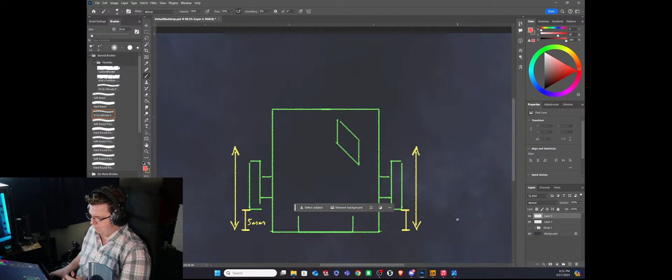Oops. Actually, I need that green back. Actually, okay, minor issue, but I did mess that up. It needs to be like this. It needs to be oriented vertically. So this is still connected to our vertically moving piece. Now let's grab another color to represent the cross piece. Actually, I should just keep this drawing open. E for erase.

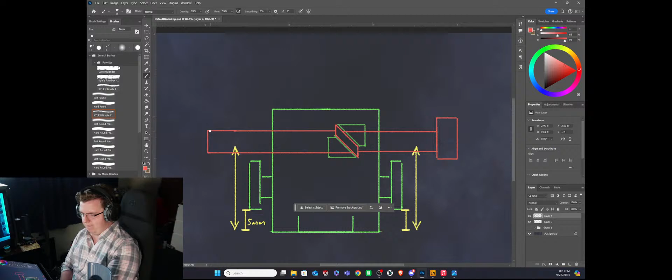And then this is a ground plane over here, so it is not allowed to move. Actually, I need to place that slightly differently. Place it about there. And this pin is allowed to move through it. And then we have a spring, and a cap to the spring, so basically something for it to push against. And it would be pretty helpful for this if this piece here were threaded. So we'll draw some threads like that.

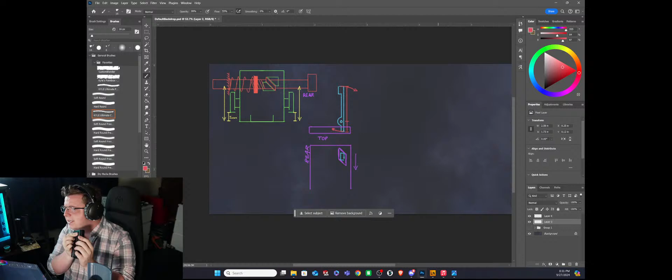With the AR style magazine, it has the rectangular window that you can just make out if I get the lighting right. Right there. So we're actually going to be putting them in backwards. And the reason why is when both of these are loaded backwards, it brings the feed ports for the magazines a lot closer to the same position. And so that's going to simplify the design process for me a lot.

So matching this up with our drawing, this is how you would be looking at that magazine. So feed port at the bottom, windows up here at the top. So we need to accomplish a similar mechanism for the SMG. Using that downward movement, we want to be able to release or grab onto the tooth sticking out the side here. And I've come up with a way to do that, that again should work.

So this is a side view now. This is our piece that moves vertically down, and all we have to do is connect it to the tooth over here with a pin located above it, and then that pin, I didn't line these up very well. That pin is rotated by, or the arm rotates about the pin based on the downward movement of our green piece here.

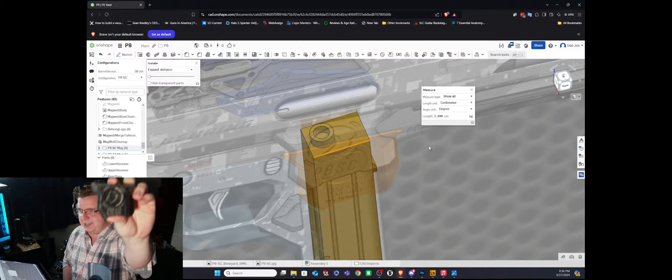And you're gonna have to pretend you didn't see this for a minute. You can see this one. Let me get that closer to you guys. So we've got the bearing logo. It says P8SC on it, 10 by 25 millimeters. And it's been done with my FDM printer with a 0.6 millimeter nozzle, so it's not very detailed, but you do get the idea. The issue that we run into is if we try to load the magazine into it, which is not suggestive at all. There. Like, it does work, but it's quite stiff. I don't want it to be quite that stiff.

Now, we are working on a P8 AR, so let's pull this guy out. And let's see. Goes in like so. This one is sliding very easily. In fact, too easily. So we can learn something from the fitment of these two, because one is too tight, the other is too loose.

So we have our P8SC as we said that this was 35.84. I'll just put my units here. So everything's in millimeters. We have 35.84 and then we idealize that to 36. That's too tight.

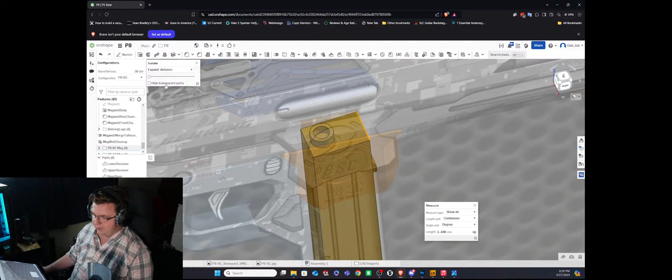And you are absolutely right, Wills. One of the great things about 3D printing is, in fact, that you can prototype and not be losing a ton of money every time.

Again, let's isolate our magazine. So we rounded up to 8 centimeters, which is 80 millimeters. And we made that 2.6 centimeters. No, wait, 26 millimeters. And in reality, it is 25.04. So let's just say 25.1. Actually, no. 0.04 would round down to 25.

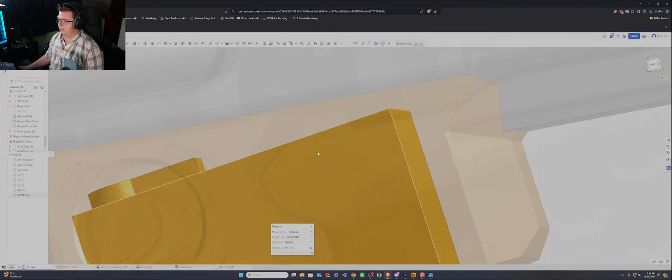So the closer these are together, the better that fit is going to be, but we don't want it to be so tight that it's uncomfortable to put the magazine into the gun. So let's adjust these now. And I think I was naughty and I did not define these as variables, so I should do that. Desmos on my other window so I can copy these down easy.

This needs to be length. No. Depth. This one needs to be... okay, so now we've got those defined. The other thing that I've gone ahead and done is I've gone through and renamed most of these features in the CAD so that they're a little easier to understand what they are.

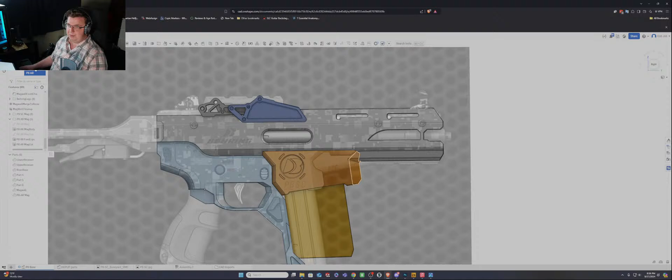So we've got the P8 AR fixed. Now we need to fix the P8 SC. So let's switch back to that configuration. And close that folder, open up the P8 SC mag. We don't want this to be 3.6, we want this to be P8 SC mag depth, which will increase it just a little bit. And then we don't want this to be 2.4 centimeters. We want it to be P8 SC mag width. Just gonna, again, increase it just a little bit. And that will update the Boolean so that now I can send these to the printer and test these fitments.

So let's do that. Actually, it doesn't matter what I name it here because I'm just going to rename it when I actually save it. Yes, replace. And then change the config. Export this one.

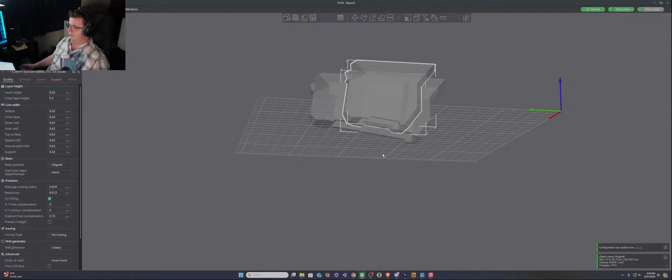It takes, so I'm not actually printing the magazines. I'm printing the mag wells. There we go. We set those on the bed. Let's make sure we've got these set up correctly. I also want this to be Arachne.

Ooh, I almost forgot something. For this magazine in particular, we need to accommodate the tooth on it. So we need to do a couple more things.

Big odd job. I'm going to take that as a compliment. I'm going to assume that you were noticing that I was getting those gains in the gym and not that I was gaining weight. Which, speaking of, how's that for a protein shake? It's mostly water, but does have 2 scoops, so it should be 70 grams.

Okay, so on the P8SC version, I've got this little channel that is supposed to accommodate the tooth. But it doesn't go high enough. And the problem with that is when we're inserting the magazine,

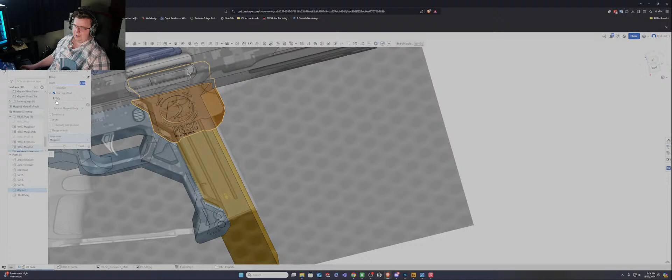So let's see. What I'm going to do is I'm actually going to have it start from this face, go the other way, and actually, you know what? For this part, I actually want it to go all the way through. So I'm just going to make that 5 so that we for sure clear everything. And then I'm going to create myself another variable.

And Onshape doesn't like you putting spaces in your variable names. So what I'm doing here is called camel case. Not to be confused with anything else, but it's basically where instead of doing a space, you do a capital letter every time you change words. So we'll just save that there, because we need to create the geometry that moves in order to reference that tooth. So I was getting a little ahead of myself.

Yes, I want to replace it. Now I can go back to Bambu. And now if I reload from disk, there, see? It updated right there. Like this with coding, you do this type of thing, yeah, yep. It's a really popular thing in coding. That's actually where I picked it up in my intro to coding for MATLAB class, and I use it all the time now.

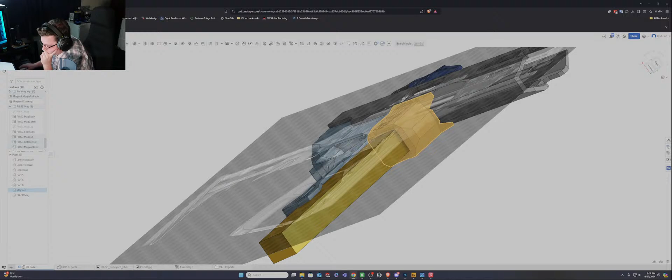And I should be able to share this on stream with you guys again. Let me try and figure out how I did that before. Okay, I think that I should be able to just turn on the printer. Oh, heck yeah, that's working. All right, cool. So we can have this kind of chilling in the bottom. Bring my face back.

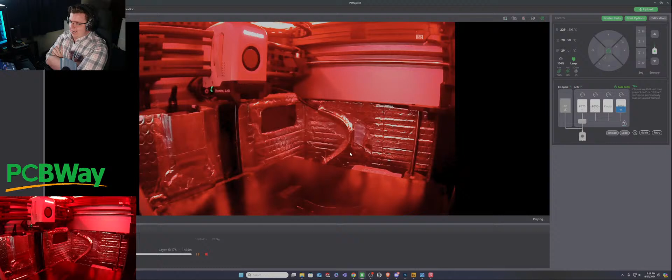BL LED is an ESP32 based light controller, and I'm using it to provide myself with status LEDs. So right now this red color indicates to me that it is in the nozzle cleaning stage of its print. And so the print head is going to move towards the back, and it's going to do a kind of a wipe mechanic. Once it's done cleaning the nozzle, then it'll cycle through some other colors as it progresses along its setup stage.

Let's see. "At my school before, I had a friend who just had a print that was the entire build plate. It was just a big cube. It was a day-long print for like a 6-inch cube." Totally know how you feel, Wills. My first printer was an Ender 5 Plus, and I hardly ever use it because it is so slow. Compared to what my Bambu can do, it's just not even worth the time to set it up.

Okay, so now that we fixed our tolerances, let's try and figure out some of the math that we need to be able to get these mechanisms to work. So switch back to screen 2, put you guys on the other screen so I can read what you're saying while I'm working. We're going to be doing a lot of trigonometry. So I hope you guys have your triangles ready.

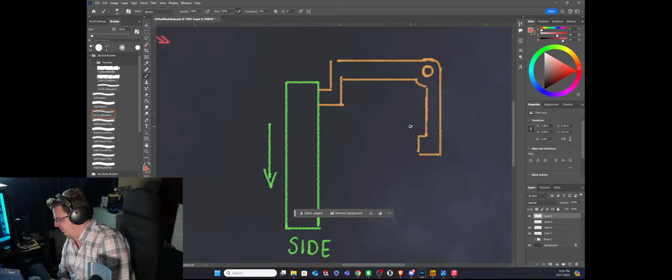So essentially what I'm saying is, let's see, I need to decrease the opacity on these guys. And what was layer 7 doing? I don't think it's doing anything actually. I think I just added that one.

So what we're trying to do is we want to get this piece here to move by 2.5 millimeters. Okay. And we have this distance that we've yet to determine. We'll call that Y. And we've got X. And we quickly see that we really need to know how much this distance truly is, that this piece is allowed to move vertically.

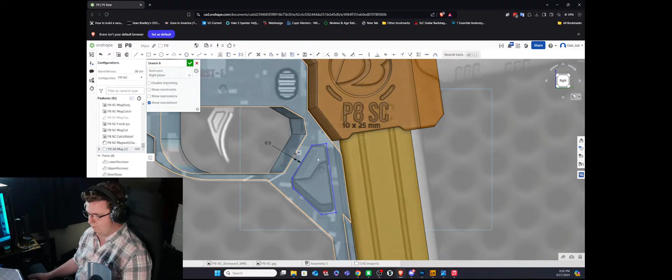Interesting. It looks like this is not a... It looks like this line is actually horizontal. So instead of making that perpendicular, I should probably just make that horizontal. That seems to match the shape better. Weird.

And this one seems to be vertical too. Okay, let me pull up another picture because I want to make sure I'm looking at that right. Yeah, it's definitely not perpendicular to the magazine slide. It doesn't look like it's totally horizontal either. I think I'm going to take some creative liberty here. Because it is such a small difference, I don't think anyone's going to notice. Except everybody now watching, I guess.

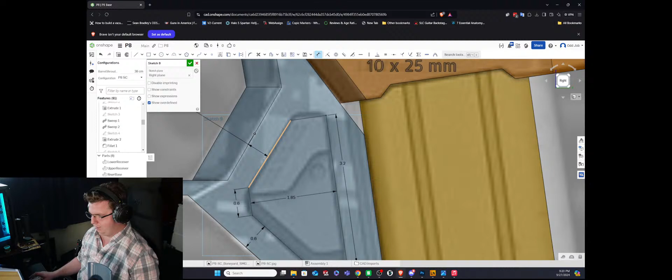And so for now, we can draw it as coming to a point because we can add a fillet to it later. I think what is going to be best is if I model the whole first and then do the moving part. Actually, you know what? Let's not do that. Let's make these two lines parallel. Okay, so now this is locked into place. We can extrude this as a removal.

Big screen back. There we go. So we're going to extrude this as a removal. I want to work on this side first. .35 looks about right. And it's really angry with me right now because the radius of this fillet is way too big. Let's try 0.2. Seems like it's happy with 0.2. And 0.2 does seem to match up pretty well with what is in the reference photo. So we'll make that permanent.

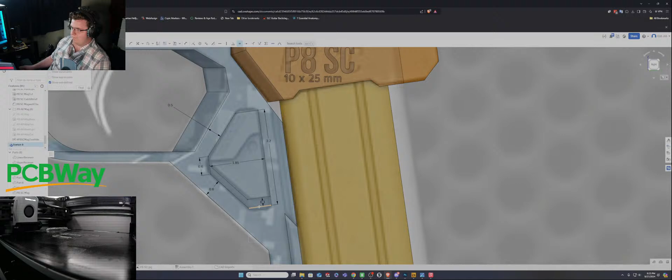I want to make that 0.3 so that I have just a little bit more leeway. So this should be allowed to move 0.3 millimeters up and down. We're going to make a new piece by extruding this. We'll set it to 0.5 so that it sticks out from the side just a little bit. Just a little bit for now. We'll make it a bit more tactile in the future. We do want it to be new.

And here's another cool trick. If we move this up above fillet 3, then we can then edit fillet 3 and include these guys. Like so. And then we need to also include extrude 13 in order to properly include fillet 3. So now we have part 10 over here, part 9 on the other side. And these are our sliding mechanisms. Oops. Okay.

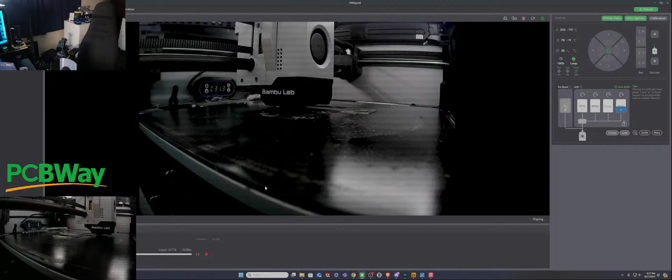Oh, yeah, the printer should still be doing its calibration. Let's see, it's saying first layer defects were detected by the micro LiDAR. I've noticed that it really struggles with the translucent filaments. So I'm gonna go check that real quick, just make sure it's not eating itself. I'll be right back. Alright, everything's happy again. It was fine. Like I said, it struggles with the translucent filaments.

Let's go to screen 2. Okay, so now, because of how we designed it, this distance is now known to be 0.3 millimeters. Okay. So now we need to get this swinging arm to fit inside this narrow section here, and it needs to have its movement contained within this thicker section here. So we don't have a lot of room to play with. I think we'll be okay, because I can make a rather tall part to get it to be rigid enough.

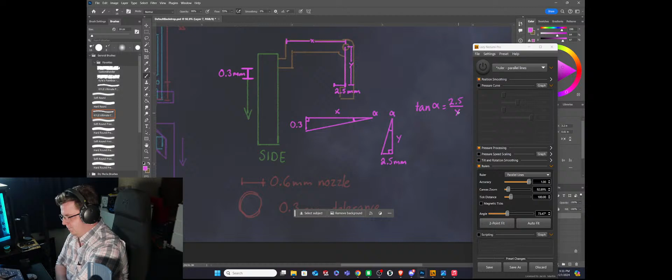So let's see, in this case, let's call this angle alpha. So alpha, we've got adjacent and opposite. So it's going to be tangent. Tangent of alpha equals 2.5 over y. Nope. Wrong. So y tangent of alpha equals 2.5.

We also have tangent of alpha equals, that can be 3. I need to keep my dimensions consistent. Equals 0.3 over x, opposite over adjacent. So x tangent of alpha equals 0.3.

And ultimately, we are solving for y, and we don't need x to be anything specifically, but we do want it to be at least the depth of our magazine. So we determined that to be 30... what do we call it? We said that that was 36.4 millimeters.

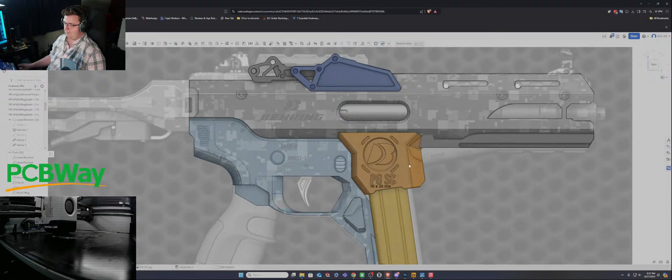So from the right side, or the right plane, we're going to draw some reference geometry. And for now, I want these two guys open. These are parallel to each other, or perpendicular. These guys are parallel, and these are actually incident. Make that transparent. Go back into this. Oh, I don't want that to be transparent actually.

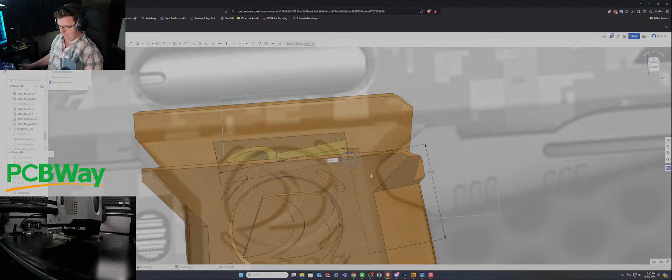I just thought of something. And I don't know if it affects anything. I don't think it actually does. So I'm going to keep it to myself.

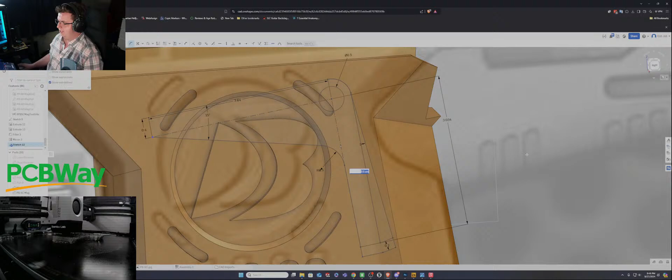And I want to add a radius to this guy because bigger curves are stronger. I don't know why this point still shows as undefined. We're going to remove some geometry from Magwell. We're going to extrude this symmetrically by mag width depth, or P8 SC mag width, plus 0.25 centimeters.

And I want it to be this face, this face. I want it to be all of those. And I wonder if I can get away with 0.5 centimeter. That would be pretty sick. Oh, looks like I can. Sweet. That doesn't create any aesthetic problems across the bottom. I want to increase this offset a little bit though.

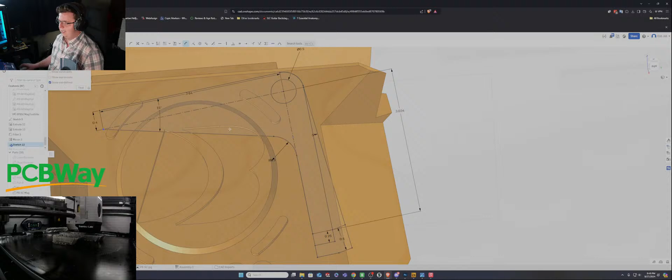And then we're going to create one more piece of geometry here. Make those guys parallel to each other. Set this equal to 0.25. Take a look at that on the inside. We want to include this shape as well. Ooh, I'm gonna need to carve out space here too. I'm gonna do that while I'm thinking about it.

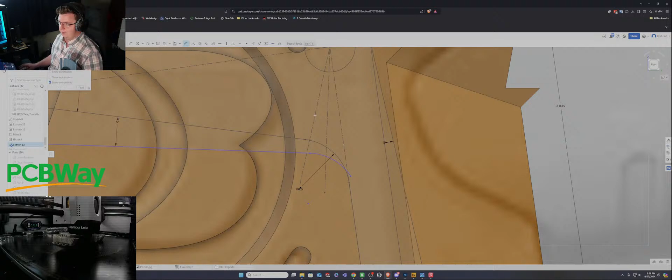Doesn't need to be horizontal. It needs to be what I tell it to be. To actually be the same. I do want these guys to have a relationship to each other. So what I can do is I can set these two lines equal to each other. And I can make the angle between them 5.

That does not need to be perpendicular to that. These two are incident. And there we go. That should work. Did that work? No. I don't think it did.

There we go. That's what I was missing. That should be a fairly accurate presentation of how it's moving. And that's going to totally wreak havoc on the extrude function we've got here. We just need to add additional faces to our selection. There we go.

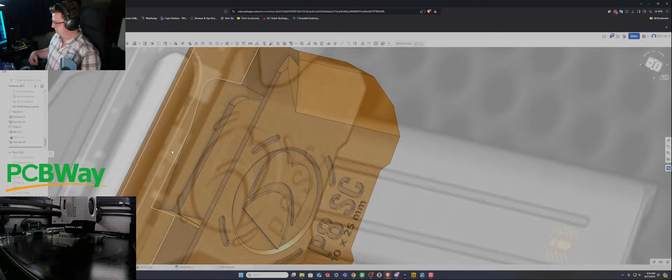Select sketch 12 again. We're going to do another extrude. This time we're only going to select this circle. And right now I just want it to be there. Actually, you know what? I need to make another circle here.

This circle. So this will be our pin that the mag release is allowed to ride on. And I don't think we need to do a whole lot to constrain it because it's going to be pretty deep inside the gun, so it's not like it's going to have an easy time falling out. Matching pin on the other side.

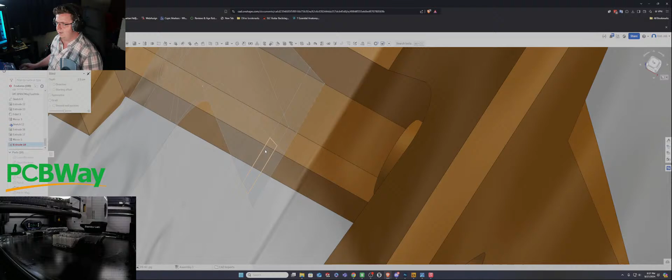And we want to do another extrude with this face. Yeah. So all of those faces. I want to create a new part. And our starting offset is going to be this entity, 0.25.

And then we're also going to want to mirror... Well, actually, no. I can do this a little more cleverly. If I extrude this face in the opposite way up to... Actually, I think I can do up to next. Add it to this guy. Okay, I do need to do up to face, and then I need to click that one. Include that in my selection as well.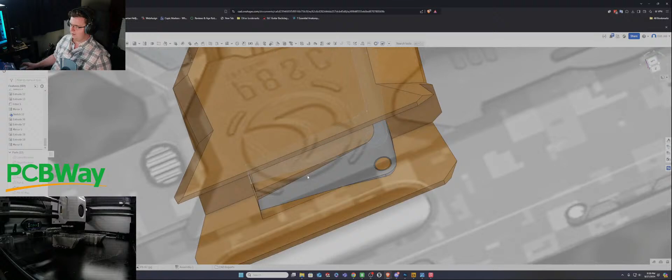And then I can mirror this. I don't want to reference a sketch. I want to reference my principal plane. Okay, that should be a working magazine release mechanism. So let's jump into our assembly here. Actually, let's go back. Let's name this. So this is part 11. Oh, but you guys should be the same part. So this is our magazine catch for the P8 SC.

Now we can jump into our assembly. Let's insert that. So this is the part we just designed, and what'll happen is when the magazine tooth slides up past this bar across the middle, it's going to push it forward, and then the spring tension from our principal spring in this whole assembly will push it into the catch position after it glides past. So this should actually work. The best laid plans always run into some issues though, so I am prepared for that.

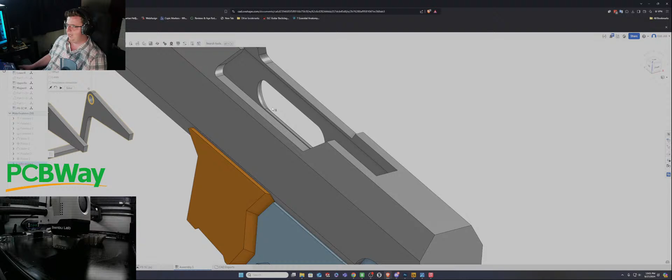Let's hide some of the airsoft parts I added in here. Let's mate this to... Let's see, so we'll add a revolute mate there. And we'll connect it that way. So we should have enough clearance that this is allowed to move. And it should be able to move 5 degrees, no more. And when it moves 5 degrees, it should just clear the tooth. So I think we are set on that part.

Okay, actually, I know what I should do. Let's isolate these parts. Then we'll make the magwell transparent so we can see a little bit better how it's moving. Where is it? Am I just blind? Alright, well, let's just look at it from here, I guess.

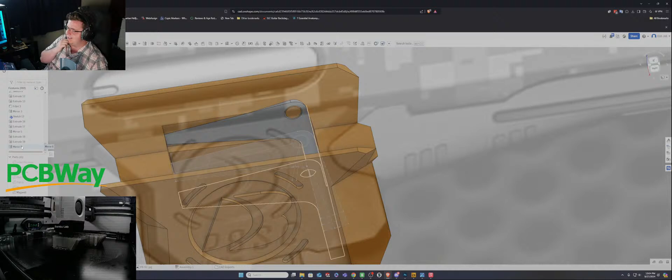Let's see, that fillet is actually defined by a sketch, so I need to change it there. So we make it tangent to these two sections. It should give us enough of a gap. Let's just make sure that we include it in the selection here. And if we go back to the assembly, we should see that that's cleaned up a little bit. Yeah, that looks good to me.

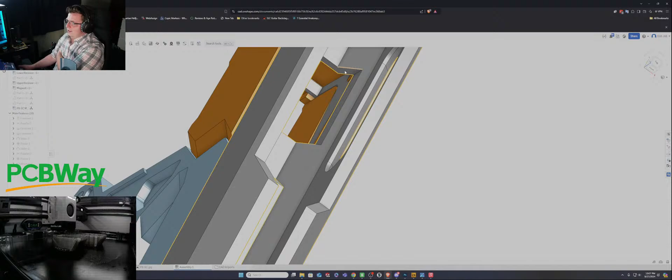One thing I do notice is it looks like the extrusion of the magazine through the upper receiver might need some work, because we've got a little bit of a lip here. That might not be an issue. No, it definitely is, huh? So let's adjust that then. That is this extrusion. Okay. Yeah, I need to not do that as symmetric because that's causing me issues. Actually, maybe it's fine.

Alright, well, let's just Boolean the magwell to the receiver. Subtract the magwell from our target. We want to keep the tools. Oh, no, okay. I think we're good then. Well, something clearly is colliding here.

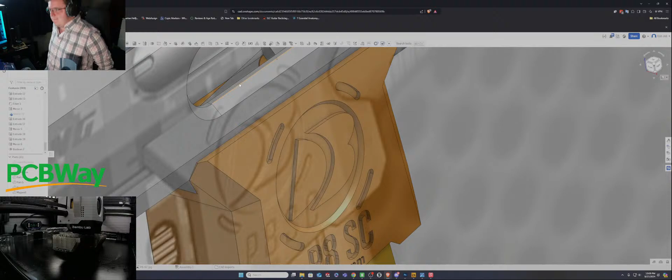How can I fix this without having to redo a bunch of work? Let me hide this so that we can see our geometry a little better. Here's what I'm looking at. The mechanism we just made to release the magazine, it's clearly intersecting here. I don't think it should, but clearly it is.

I think what I can do is I can extrude the top face of... Let's play around in the assembly, see if it's causing the issues I think it is. You can see it's clearly inside that other piece. Can't have that.

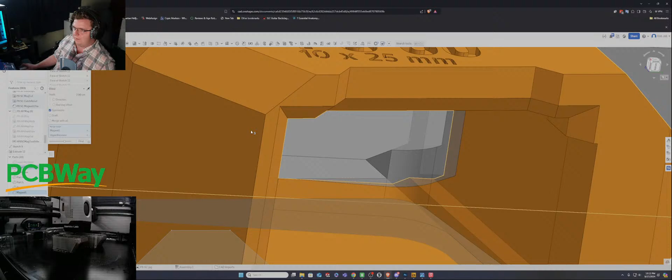Okay, I think what I can do is I can combine the extrude that we just did to create a pocket. Can merge this to upper receiver as well. Extrude up to the right face.

Starting offset set as... wait, cancel. Okay. I wanna do that differently. Oh, that's right. We set this as a... so I think as long as I include the upper receiver, I think I'm actually good. Yeah, it might rub a little bit, but I think we're set.

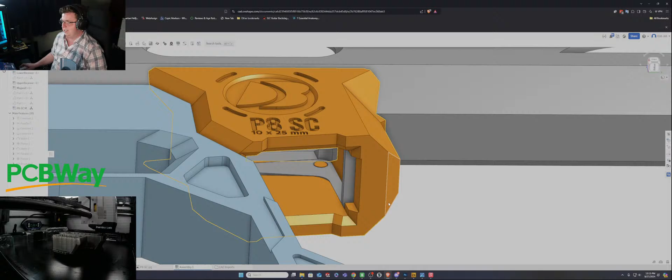Right now, we are working on getting the magazine catch working. So, to anyone that's new to the stream, we've got a tooth on the side of the magazine there that we need to catch. So this gray piece that we've just made will allow the tooth to slide past because it's got a slant on it. And then once it passes, it will move back into position under spring tension to keep the magazine locked into place. So it should be pretty secure.

Let's take a look how our X1C is doing. It's chugging right along. We should be able to test our improved tolerances in just a little bit. So now we need to tie all these parts together. And trying to think of the way I want to do this.

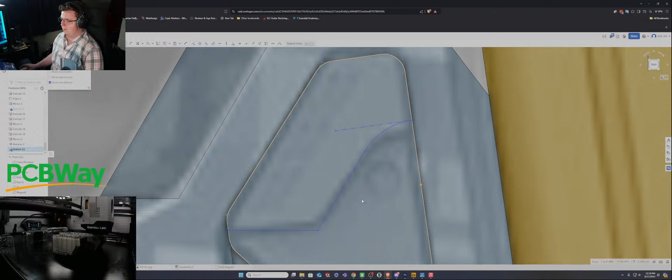It's some catchy beats, right? Thank you, oh, what's his name? Harris Heller from Senpai Gaming. Just add a mental laugh after that one beat drop, yeah.

Actually, don't want to dimension that. Instead, what I'll do is I'll pull that onto there, and then it doesn't matter what the dimension is. I'm gonna call this 3. Let's see. If I get a 3mm steel pin, which is probably going to be the best way to assemble that,

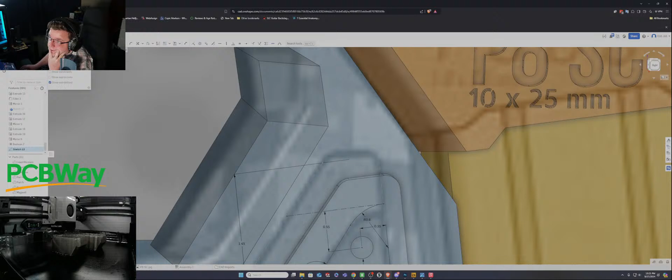Heck, sketch or convert. Why is that not doing what I think it's supposed to be doing? Oh, I was using the wrong one. There we go. Fighting me. Guess I can do it this way.

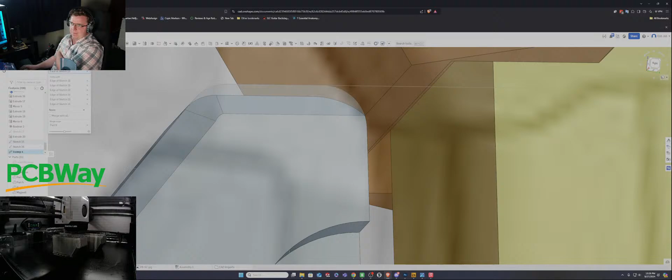Bothers me that this is not tangent. Why is that? I think I can fix that by changing this angle. Yeah, that looks a lot better. It's not perfect, I guess, but now I can't tell, so I don't care.

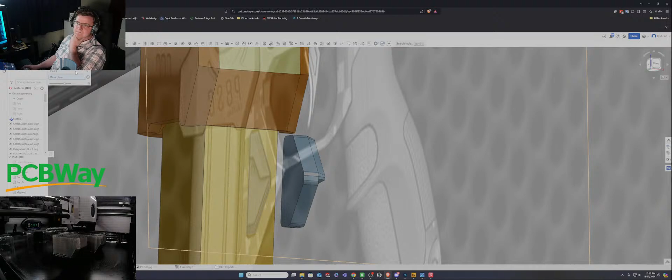Just do it. Nope, that didn't work. Okay. Do you want to reapply then? Let's actually do this. Let's delete that. And then we'll mirror this body. There. That works. Need to lock my backrest. There we go. Now it's a little more supportive. All right. So then we need to... I'm gonna roll back to before this.

Let's edit sketch. Oh wait, no. Actually, we don't need to edit that. We need to instead... come on. Is it not letting me click? There we go. Through all, make it symmetric. Merge it only with this part. Okay, why did that not work? Oh, because I unselected it. That's what I did wrong. Then if we roll it back, now both pieces have that 3mm pinhole through them.

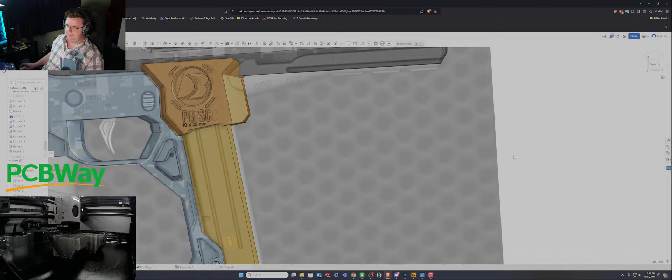And I think what I ought to do is actually make that 3mm pin into a slot in the lower receiver. That sketch now, and that one. So this is the first of our cam profiles. And we want these to be concentric with this, but we don't necessarily want them to be the same size. We do want that to be our 0.3mm distance.

And I'm going to make this 0.2 for our radius. Actually, no. 0.175. Well, now I'm breaking my own rules. Let's see. If it's a 3mm pin, I know it's going to be exactly 3mm because it'll be a 3mm steel pin. So the radius, I think 0.2 will give us a good glide.

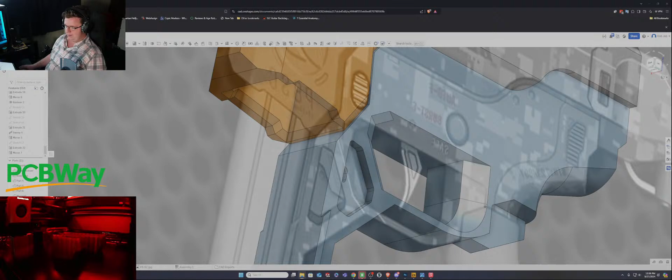So now let's hide our magazine. We need geometry that is able to slide in the middle here. So let's pull up some reference images that I took. Wait for these thumbnails to load a little bit, I guess. There's one in particular that I'm looking for. If you reload and catch the right image... oh, come on. Let's see. How do I make the icons bigger? What am I missing? Oh, view. Here we go. Extra large icons. There we go.

All right. One of these, I caught the front geometry of the rails where the magazine kind of slides through. I thought I did. Oh, you know what? No, actually, now I remember. I actually already moved that over. All right, so just behind our magazine, we have this kind of rail pattern. And it looks like, based off of what I can tell, this is a little bit of a window here. So if we look at this from the bottom of the mag well, it evenly divides it into 1, 2, 3, 4, 5 sections with 5 lines.

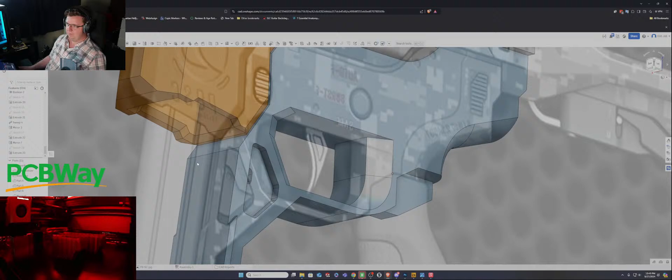And you know what? I actually don't think I want to worry too much about making this specific detail match up aesthetically, because if instead I just make it functional, I think that that's the most important thing. There's going to be a magazine in front of it most of the time anyways. So this is one of the concessions I'm going to make in order to focus on making this thing functional.

If I extrude that straight back, still got a little bit of a clearance there, but that's not a lot of material to keep this thing from breaking. So we want to increase that a bit. Let's do it like that for now. And then we'll make these not incident like that. That 1.5 centimeters should be big enough to make a decent sized part. Checking the status real quick of the...

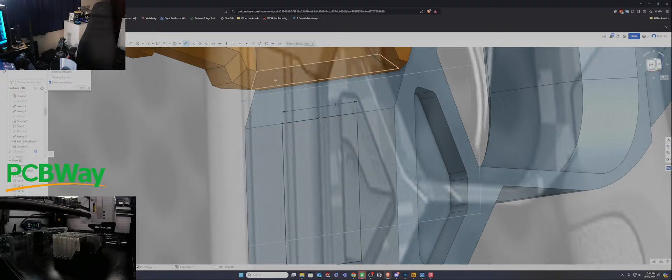So this little piece was the problem. I don't know why, but Bambu Lab, in their infinite wisdom, decided to give the end of the filament a little bend, which prevents it from being taken into the AMS properly. So what should happen from here is it's now basically empty, so it should switch over to this other roll and continue with that one.

Oh, and you know what? This shape needs to be a little different. Oh, come on. There we go. So let's make these vertical to each other. Now it's centered.

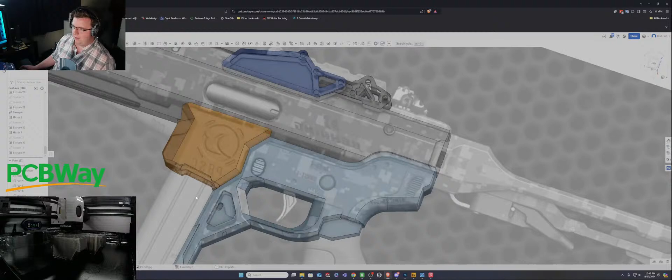And I actually want to make this line coincident with this edge way up here. And then I want to adjust the extrude to include all of that. So now I've got lots of room to make my mechanism for moving this stuff around. But I don't want it to cut so deep that it's visible here. So let's reduce it just a little bit.

I don't want the magazine there, actually. I just want to be able to see this part. I think that's what I wanted.

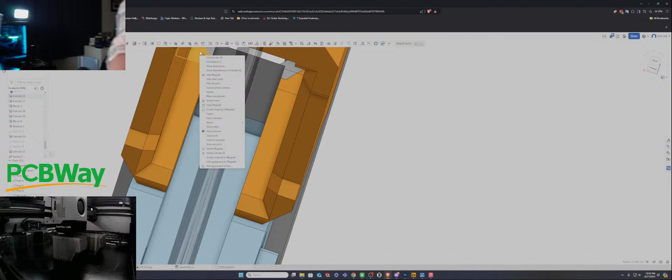Why are you doing that, Mr. Gimbal? How are you running low on battery? Alright, well, I'm going to need to retire the gimbal, so I'm just going to move the camera around for a minute. It's a decent enough camera angle, right?

What was I doing? Oh yeah, okay. So from this face, let's create a new sketch. And I want to include these guys. Well, no, actually I don't want to include all of those. I do want to include just that line though, and this line. I really want to hide this sketch again because it's in the way, or the image.

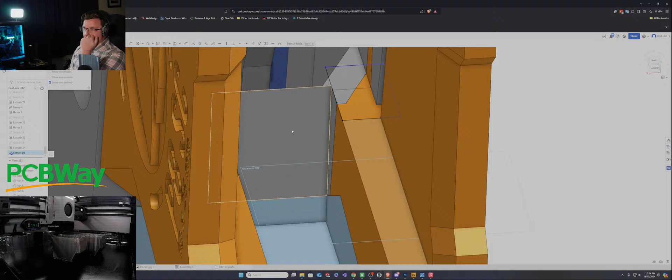Actually, delete those because I can mirror this and that'll be more efficient. And let's actually not use that line because I just want it to go all the way across. Oh, that's how I was able to see it before. All right. Okay, so let's reference a midline instead then.

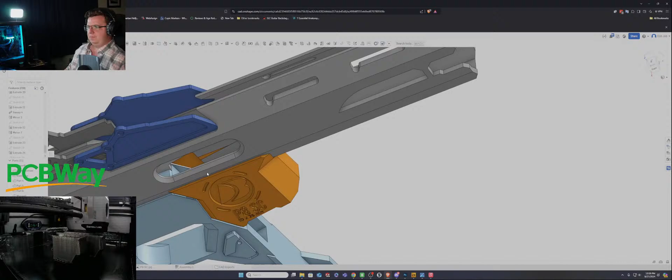But we have to include the magwell in it, because otherwise we're not getting all the parts we need. What to do? Well, I guess, actually, I only need this bottom section to have that much clearance. So this top section I can actually do by even just that much.

No holes. And then down here, let's just add another line to include this line and that one. And then show that sketch, do another extrude of these two sections. Now we've got lots of room for those to move.

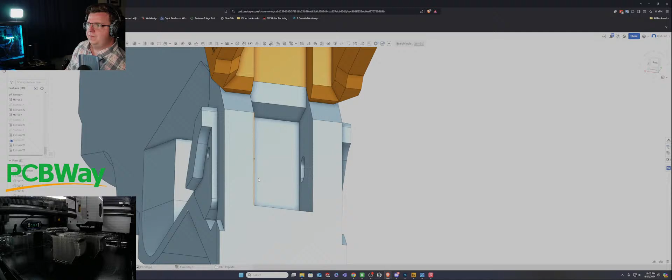Extend this as well. Maybe that's not how I want to do this. Let's delete those. Let's not do it that way. This. Okay, let's just do a sketch from here then.

Our part is allowed to move 0.3 millimeters, but because I don't need it to be super precise, I'm just going to give me lots of room to move it and only worry about constraining it where I have to. That's going to be how we reduce friction as much as possible.

For instance, here we'll set it to 0.3 millimeters so that on either side we get that tolerance. This should be allowed to slide up and down pretty smoothly. Make these two equal because they are going to be doing the same thing on both sides. I'm realizing a problem, but I don't need to fix it yet.

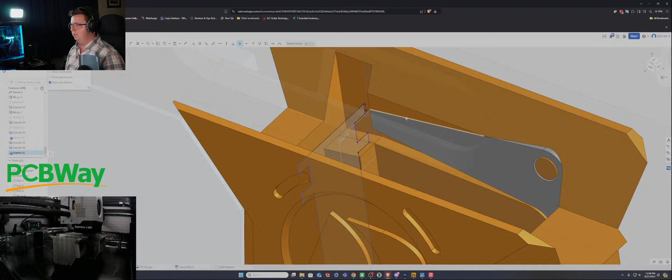So I'm creating this little comb shape, and that's going to grab the top and bottom of this swing arm. And I need to build some more tolerances into this. And I'm just going to leave it as 0.3 millimeters because I actually want this to be a pretty tight tolerance. But over here, I don't need those to be that tight. Don't actually want this. I don't want those to be equal because I actually want the distance between these two guys to be at least 0.3.

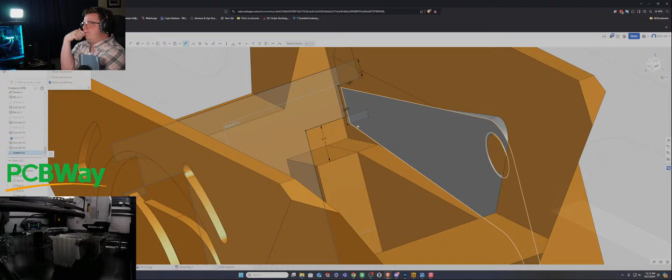You guys should be parallel. Why aren't you parallel? Okay, let's reference this one, I guess. Crap. That's an issue. Okay, I'm going to come back to that because I think I know how to fix it. Actually, let's cancel those changes. And let's dive in again. Let's actually just make more geometry down here. That's looking better. Now let's come back to this one. Now let's actually just make these guys equal, because now we have space for it.

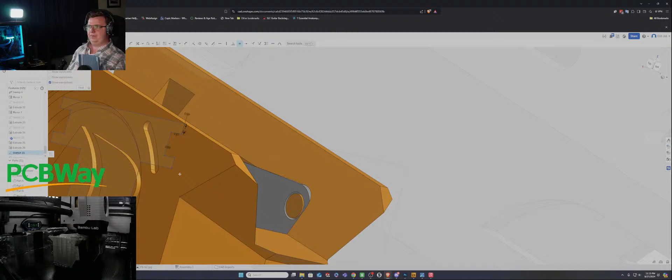So the key here is at the contact point, which is where this plane and this plane intersect, we want the total vertical travel to be 0.3 centimeters or 3 millimeters. So we don't actually care too much about what happens behind this plane. We just need to make sure that whatever we do allows that to happen. So what I can then do with this shape, send it back the other way, and we'll do up the face, but with an offset distance of 0.3 millimeters from this face.

We exit the isolation. Let's hide the upper receiver. So now we've got our little cam. Should have enough tolerance on all sides to be able to move the way that it is intended to. It's kind of a chunky boy, so it should be able to handle all that force. Now what we want to do is we want to extrude. Hold on, where's my isolate? Shoot, let's not do that. Wrong button. Let's isolate this part. And then let's extrude these two faces.

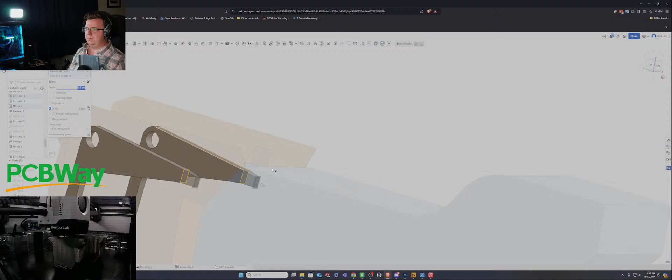I think I want that to be 10 millimeter, or 10 degrees actually. And that should give me just a little bit of a taper so that it doesn't impede the movement. But let's send the direction. Send it that way. And let's now isolate these two pieces. See how they're looking together. I think that should work. It might need a little bit of adjustment, but I think that that's to a point where I would like to print it and find out later.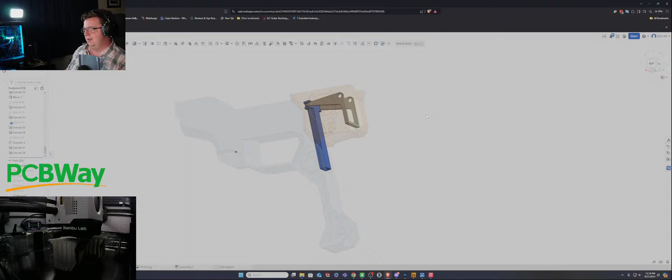We've done enough work that it's probably good to do some testing before I fiddle too much with that. But in theory, what should happen is when this is pushed down, this will rotate, allowing the magazine to drop out of the bottom. And that will be the main function that allows us to use this as an airsoft gun as a P8 SC. Exit the isolate there. Make that transparent.

And then on this face, we're going to do a new sketch. That's not gonna work. Oh, but if I project those, and then I can make these construction geometry.

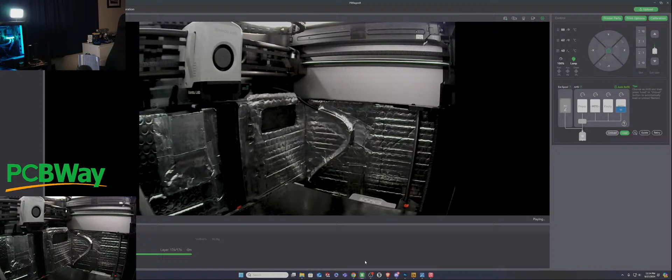All right, fresh off the printer. Let's see how our fits are. So it's definitely less movement. I'm hearing a bit more rubbing, which, I mean, we did tighten the tolerances a little bit. I am pretty happy with the AR magazine fitment. So I would call this a win. Let's see, why isn't that? So it's enough that it'll actually stay in there, but it's still pretty easy to take out, which is perfect.

With the SMG one, again, just about perfect. This one is a bit looser than the AR one because it has that trough for the tooth. But we've definitely got clearance that we didn't have before, which is good. I don't know if you guys are going to be able to see that. Yeah, that is great, actually. So I'm pretty happy with the fitment of those. We can call that part done.

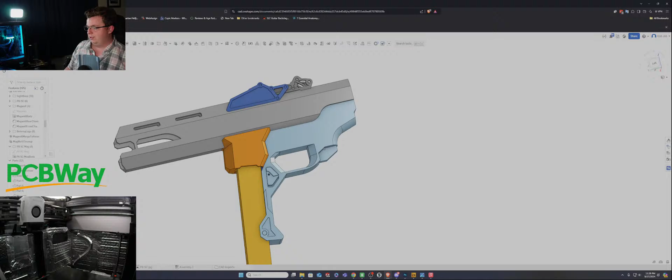We've got the comb that connects these two buttons to the mechanism that releases the P8 SC magazine. We've drawn up some plans for how we're going to accomplish the same thing with the P8 AR. So we know how we're going to do this. It's going to be a little bit different, but same idea. We did quite a bit of math to figure out exactly how big this swing arm needs to be so that we can design it right the first time.

So I'm pretty content with everything that we've been able to achieve so far on stream. I think this is probably a pretty good stopping point. Let's kill the music.